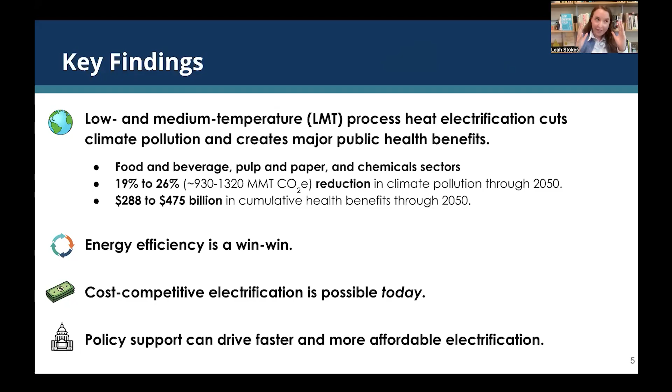It involved a very large team of engineers and policy analysts, and we went piece by piece through the food and beverage, pulp and paper, and chemical sectors, and really built out models of how these industries operate in the real world. And what we show is that low and medium temperature process heat electrification is possible today with the technologies that we have that are off the shelf, and that it can cut both climate pollution and create major public health benefits. So on the climate pollution front, we're talking about a thousand million metric tons, which is a gigaton of CO2 in terms of reduction by 2050. That is a big number for those who aren't in the gigaton trade.

We also find very significant public health benefits. So we're talking about the order of 288 to 475 billion with a B dollars in public health benefits. These are things like fewer asthma attacks, fewer visits to the ER, and longer lives, because we know that pollution in our communities from these factories is affecting people. Throughout this report, we also look at energy efficiency upgrades that we can do to reduce overall primary steam production.

And that's really a win-win because it reduces the costs. And we show that already in many states and some specific subsectors, electrification is cost competitive today. And even in places where it's not,

primary heat is not a big input into manufacturing, meaning that, for example, if you electrified a milk processing plant, a pasteurization plant, and it doubled your energy costs through electrification, that would still only add 1 cent to a gallon of milk. So we can do this. We can make progress today with the technologies we have, even with the cost as it is.

And of course, policy support, whether in a future federal moment or at a state level, can really make this accelerate and drive faster and more affordable electrification.

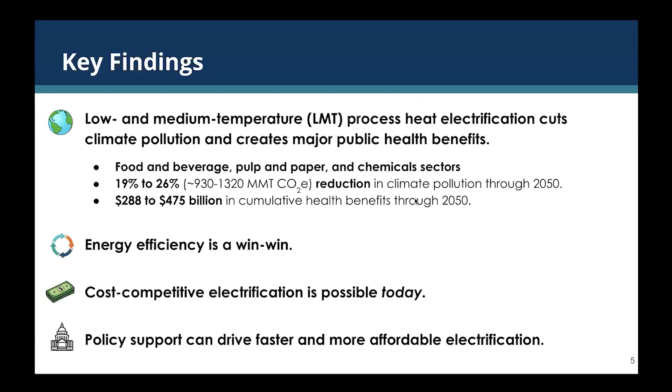Thank you, Leah. It's great to be with you, and thank you for your work on industrial decarbonization, which is a huge part of our climate solution. I'll touch on three things, but I want to open by saying how glad I am to be on this program with Martin Heinrich. Martin and I are the two ranking members, him on energy, me on public works. We're working on permitting reform, which I'll get to later. And he and I have been working on climate issues together as part of a little Senate climate team for quite a while now. And he's quite outstanding, as you'll see in his remarks.

The first of the three things I want to touch on is CBAM, the Carbon Border Adjustment Mechanism in the European Union. If you track the Potsdam Institute's work, they've done a review of like 1,200 different climate scenarios that were generated for the IPCC process over time. And out of those 1,200 different climate scenarios, there are 11 left. 11 out of 1,200 left that get us on a pathway to climate safety.

All the others are exits we drove by a long time ago, and they just aren't available to us any longer. So it is now essential to climate safety that we look at what those 11 different scenarios show, and all of them require a price on carbon. The pollute for free business model of the fossil fuel industry is lethal to our chances at climate safety. In addition to being morally wrong and economically wrong and environmentally wrong, it also is a dead end and a prescription for climate failure. So we really have to focus on trying to support and expand the CBAM.

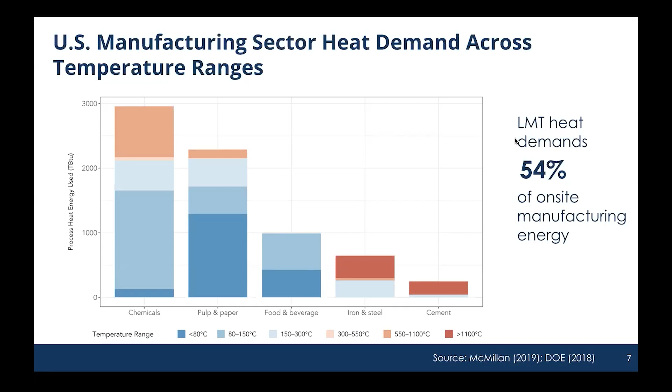Around half of that heat is what we would classify as low to medium temperature process heat, meaning that it falls under around 300 degrees Celsius. Now, that might seem pretty hot by human standards, but by industry standards, it's actually quite low, considering that some industries like cement or iron and steel require process heat in the thousands of degrees in order to perform their operations.

And so, why is this range of temperature important? It's because we have technologies that are available today that can replace fossil fuels for generating that heat with clean electricity. And these are ready today.

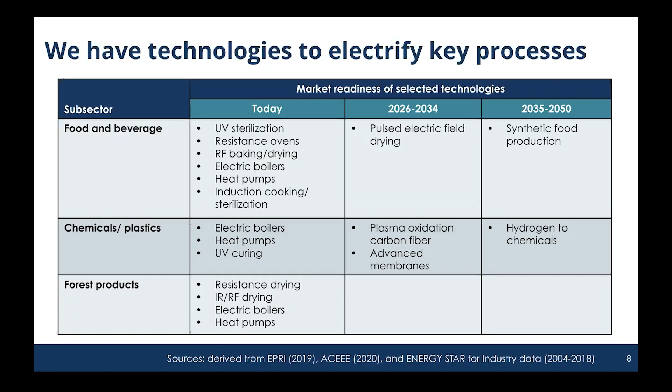And just to give you some context, the results you're going to be seeing are really focused on three primary sectors in the United States. Which are these sectors? These are the chemicals manufacturing sector, the pulp and paper manufacturing sector, and the food and beverage sector. So collectively, these three sectors account for many thousands of products that we purchase in our daily lives that are critical to our economy.

They account for many jobs across many states in the United States, but they also account for the vast majority of that low and medium temperature process heat opportunity that we're going to be exploring today. Overall, all forms of heat in those sectors account for around a third of the emissions from the US manufacturing sector. And the US manufacturing sector is clearly only one of the sectors that we need to decarbonize, but it's an important one.

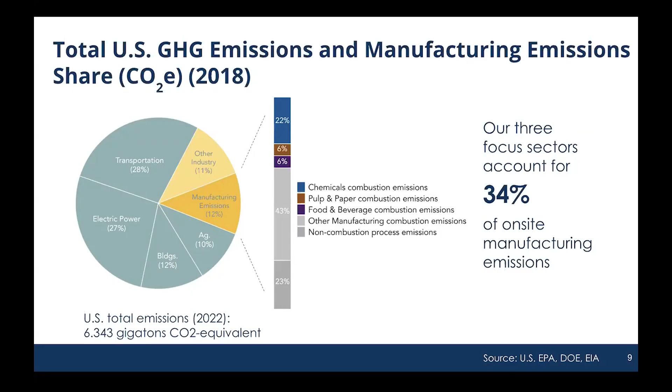But just to put it all into context, if those numbers seem a little small, we need to take a step back and remember that the US is the second largest emitter of greenhouse gas emissions globally, right after China. So this one space, low and medium temperature process heat in these three critical sectors, actually can contribute an outsized share of the global mitigation we need to keep our global temperature rise in check. So they're very important. And with that, I'm going to pass it back over to Leah, who's going to talk a little bit more about our scope.

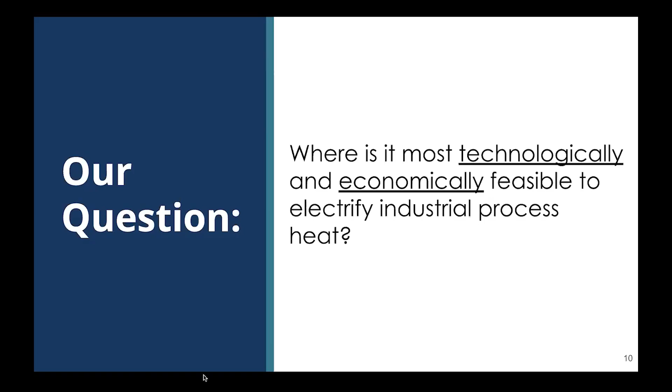So what we do in this report, which, as I mentioned, was quite an undertaking, a very large team of engineers and policy analysts working for really a year and a half. And we wanted to answer this question, which is, where is it most technologically and economically feasible to electrify industrial process heat today? That's the question we want to answer. And what we focused on here is really four main technologies.

So the first is an industrial electrode boiler. This is what we're going to call a sort of drop-in technology, because you could take a natural gas boiler that's already operating at a plant and you could replace it with a fairly similar footprint as well as a fairly similar process.

And you can think of it as equivalent in, for example, the building sector to something like a resistance heating technology. The second big technology, you won't be surprised to hear me say, is a heat pump. It's an air source high temperature heat pump. So these are much bigger than the heat pumps that you might be familiar with in a home context, in a building context, but they have the same sort of principle. And there's been a lot of breakthroughs recently with companies like AtmosZero and Skyven that are able to do higher and higher temperatures at a more economic price.

But I don't want to leave aside other direct combustion that's happening. So right now, for example, if you want to cook something, like you're making cookies, for example, in a facility, or you're drying herbs for tea, dried tea, that is using direct fired gas in a lot of cases. And we can be swapping those out for electric ovens, just like you might have in your own home, an electric oven and an electric dryer, right? Same sort of principle, but on a really big scale.

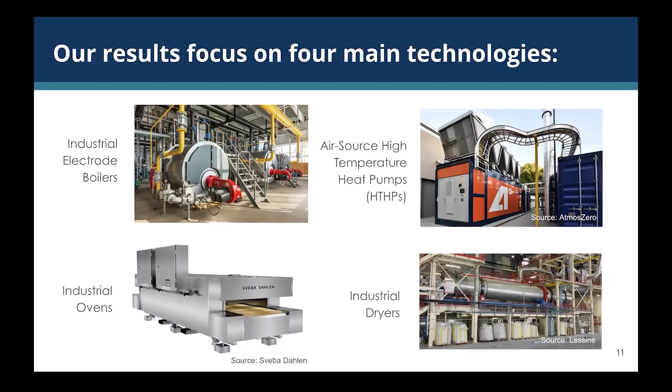And so what we looked at for each sector is we came up with four scenarios that combine all these technologies. So in the baseline scenario, what we did was we first modeled the processes of how we think these plants are operating today across all these different subsectors. And then what we did is we said, well, what if instead of using gas boilers and instead of using gas ovens and dryers, you instead swapped in an electrode boiler? So that scenario is what we're calling drop-in electrification because it doesn't require a lot of systems change and it has a similar footprint in the actual facility.

Now, you can also combine that drop-in electrification with energy efficiency upgrades. This is an old idea that is evergreen, right? Which is the idea that we could be insulating pipes, for example, using waste heat recovery, trying to maximize every little drop of heat throughout the system so that it's not leaking away. And so what we look here is at pretty tried and tested ideas for how we could upgrade the thermal energy efficiency of these plants.

The second major block of scenarios is what we're calling an advanced electrification scenario. This is a scenario where we're swapping in an air source high temperature heat pump, and we're also electrifying those downstream processes where they exist, like those ovens and dryers. And again, we have a scenario where we combine that advanced electrification, putting in that heat pump, which might require some retooling of the plant a little bit or a little bit of different floor space. That's why we're sort of framing it as advanced. And we combine that with energy efficiency too.

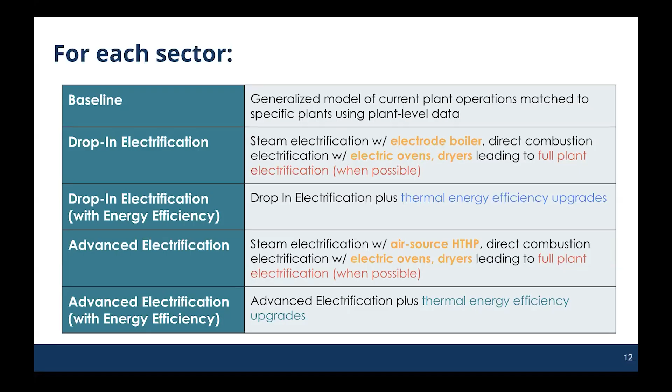And what you see here is combining a really efficient machine, a heat pump, very efficient, right? It has coefficients of performance of like 300%. Combining that with traditional energy efficiency is really where you get a lot of those operating cost savings because it's just such an efficient process. So with that, I'm going to pass it back to Eric to walk you through what this modeling process actually looks like in practice. Thanks, Leah.

And I promise I'll be concise here because what you're seeing is quite complex. And that's because industry can also be very complex. And so the way we designed this project is we didn't want to just make high-level assumptions about what a fluid milk plant could do or what a pulp and paper plant could do. We wanted to base our analysis in a really rigorous understanding of the operations that are occurring in those types of plants. And we did so by developing a series of what we're calling process archetypes.

And the example you see here is for breweries, circling back to the idea of beer, which we'll get to also at the end. And the idea behind these archetypes is that we wanted to acknowledge the complexity of industrial plants, but also cut through that complexity so that we could identify opportunities that were both feasible in a real world context, but also realistic for plants. And so what you're seeing here is kind of a schematic of what an archetype looks like.

So for making beer, there are a number of unit processes that occur in most breweries. These facilities use a lot of steam and hot water that typically comes from a boiler. And we've modeled all of the energy and mass flows that allow a facility like this to take in its inputs and to produce that output, so many liters of beer.

The advantage to this is it makes sure that we get all of the process intricacies correct, right? We don't ignore something that would be potentially a barrier in a real world plant. The archetypes are also open source, meaning that anyone can use the code, look at our assumptions, replicate it, and vet them right down to the specific technology. And here's how we use them.

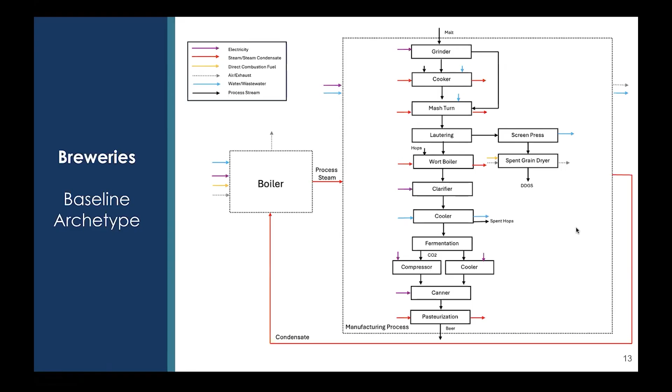So this first baseline archetype, we start with this understanding, and we calibrate these archetypes using reported data for large breweries coming from, for example, the EPA's greenhouse gas registry, other information from the literature to make sure that our baseline understanding of a sector is technically accurate. We then use the archetypes to start deploying technologies. So Leah just described to you our scenarios.

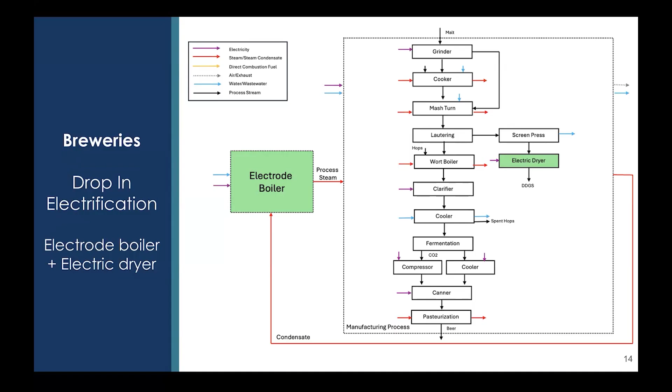So in our first scenario, we're looking at electrifying the boiler, replacing the natural gas boiler in a typical brewery with an electrode boiler. And we're also electrifying the spent grain dryer that was previously running on natural gas. But we're doing so in a way that respects the overall energy and mass flows of the facility. Next slide, please. We can also use the archetypes to look at even more ambitious scenarios.

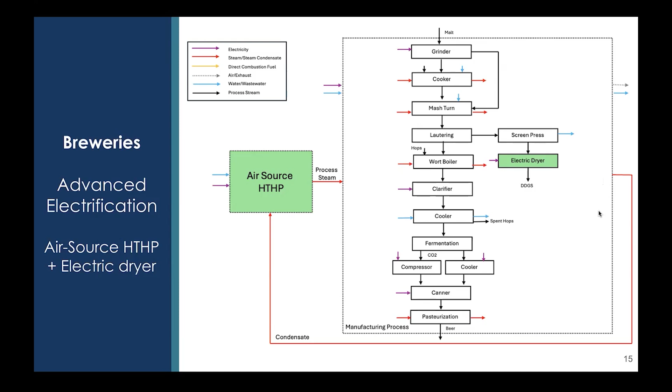Well, what if we didn't just go for electric boilers, but we considered deploying an air source heat pump? The big advantage to heat pumps as opposed to electrode boilers is that they're much more efficient for providing a unit of heat. Why is that? It's because they move heat from one place to another by using electricity rather than creating heat through either combustion or a resistance coil. So you get a big efficiency gain by using air source high temperature heat pumps. So this was another scenario.

And then finally, because we've modeled these plants with such detail, we can also look at the first fuel, which is energy efficiency. It's called the first fuel because often it's very cost effective and it allows you to save energy rather than investing in more energy in the first place. And because of this detail, we can look at a lot of efficiency upgrades at a typical plant, including things like process controls, improving insulation, improving steam traps, a lot of technical details.

But we can also deploy a waste heat recovery heat pump, as you see in this diagram. And for breweries, that could mean taking some of the warm water that comes off the wort cooler and recycling that heat and upgrading it to provide hot air for the spent grain dryer, thereby reducing the need for electricity after we electrify.

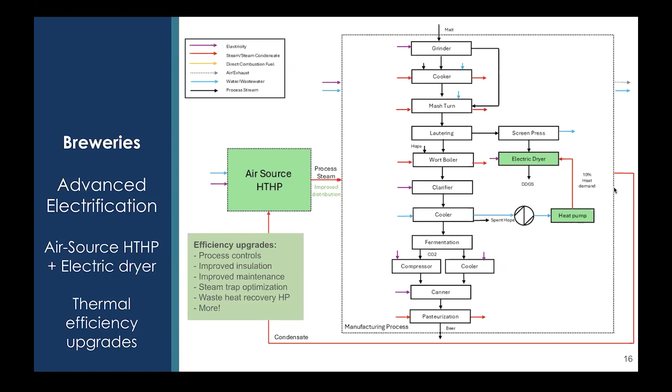So the beauty of efficiency is you get the same product with a lot less energy input, which means the investment that you need to make in a heat pump or an electrode boiler or even a dryer gets more tractable because the capacities go down thanks to plant level efficiency. So our argument is we want to do it all at once. And I'll turn it over to Leah to talk about some of the results from this approach.

With electrode boilers, again, the analogy here, if you're familiar with resistance heating, and for example, the Southeast has a lot of resistance heating in buildings, is they're not as efficient of a process, so they need to use a lot of kilowatt hours to make that heat. And so with the grid as it is today, there would be some short-term emissions increases.

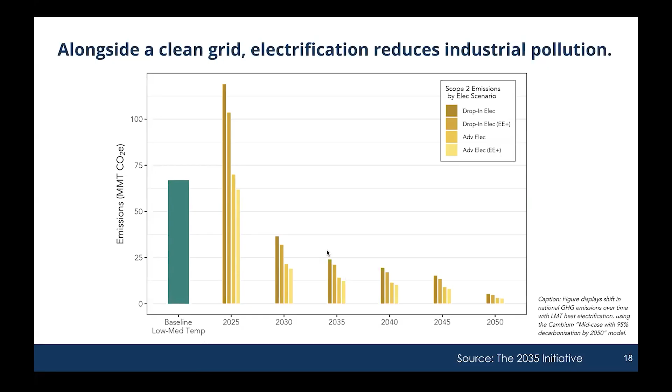And the brilliant thing about electrification, which you might be familiar with if you know about electric vehicles or heat pumps in buildings, is that they kind of get cleaner over time, right? These machines are as clean as the input fuel that you're putting into it, as clean as that kilowatt hour is, as clean as the electricity is. And as we clean up the electricity grid, these technologies essentially get cleaner. And you can see that very clearly here, that out by 2050, we have very, very little emissions coming from these actual technologies because the grid is so clean.

We also just wanted to unpack this for today. Now, this is using 2023 data, so it's already a little bit old, but that's the most recent data that we had available. But you can already see that even 2 years ago, if you put in an air source heat pump on average across the United States, these are these high temperature heat pumps at an industrial facility, on average, you're going to already start saving emissions. That isn't as much the case for an electrode boiler, but it is the case in many states, like in California and Washington and Vermont. And that's because those grids are already clean.

And what will happen is that as the grid gets cleaner over time, all of these technologies will really be cutting pollution very easily. So it's a very similar story to what we know from electric vehicles, right? Sometimes people think, well, if I plug in my electric vehicle, is it actually dirty because the grid is running on coal? These technologies, especially the heat pumps, are so efficient that they don't have to use that many kilowatt hours. So even as the grid is still cleaning up, they're already saving pollution.

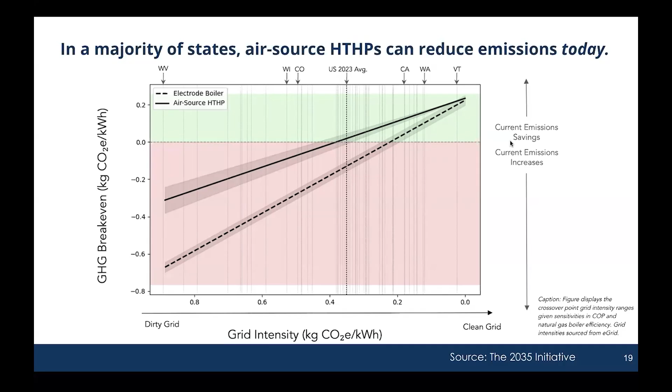The other thing that we wanted to do in this project is really look in detail at what are the different emission sources, what are the different fuel sources from the chemicals, pulp and paper, and food and beverage sectors. And what you can see here is that in the chemical sector, a lot of the fuel is natural gas. Now, we can't electrify all of that very easily because some of it is higher temperatures that we're not looking at in this low and medium temperature process heat.

But you can see here that that really big blue bar at the top under the baseline, what it turns into essentially is that yellow bar, because you're moving the on-site combustion of gas into sort of what you might call scope 2, or I think it's scope 3 emissions, right? It's the off-site purchase of clean electricity. And so you can see here that it really does shrink down if we electrify the parts of the gas that can be electrified easily in low and medium temperature process heat for chemicals.

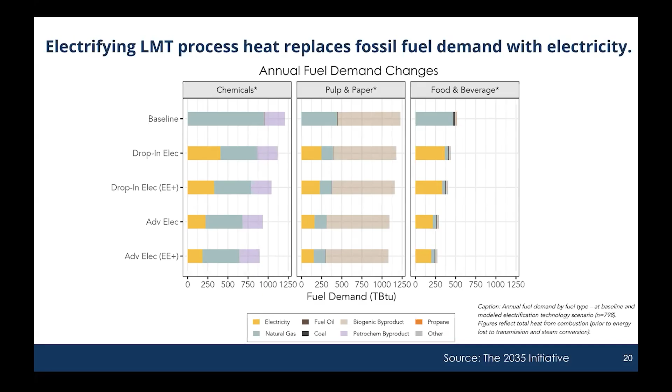And one of the findings from our report is that pulp and paper is a really big sector with a lot of opportunity just with electrifying that boiler, because these are really, really large plants from an emissions perspective, even if we only look at the fossil fuels. Food and beverage, by contrast, is a sector where most of that natural gas can be electrified. You can see that that blue bar shrinks down a lot. And again, the yellow is just the electricity scope 2 emissions. And so as the electricity grid gets cleaner, that will get better too.

Now, of course, you might be wondering, with all this talk about data centers and some of the things that the senator said, that, wow, if we need more electricity for all these large factories, isn't that going to increase electricity demand? Yes, it will. But this is something that can be managed. And my personal view is that this is a really important thing that we have to electrify, right? We want to keep manufacturing in the United States. We want to have these good paying jobs, and we want them to be clean.

And for all the reasons that Senator Whitehouse talked about with the carbon border adjustment mechanism, right? It's going to be a competitiveness issue as well, to make sure that we're not being left behind as Europe continues to invest in these kinds of technologies.

What we did in this scenario is we looked at the bottom quartile, the 25% of the plants that have the best payback period, and we said, what if they all electrify tomorrow? What would that do to the grid? And so some of the best paybacks that we're generally seeing are in the Midwest, and so that's where we see a really big jump. Similarly, in New York, there's a really good payback period because the electricity price compared to the gas price is such that it's actually a very good state to work on electrification.

Now, this isn't how electrification would actually proceed. California, in our model, has such high electricity prices that in this 25% cheapest scenario, nothing gets electrified. Well, we know in practice that California is very committed to electrification. They have the Indigo program, for example, and they want to move factories in this direction.

So in practice, we likely would see a very different pattern, but this just gives you a sense that we are going to have new demand and load on the grid, which is why it's so important that we build clean electricity really fast and we interconnect it into the system quickly, and that we make good decisions when it comes to other large loads like data centers, because the industry does have to be electrified if we want to be keeping good paying and clean manufacturing jobs in the United States. And with that, I'm going to pass it back to Eric to talk through the economics of electrification.

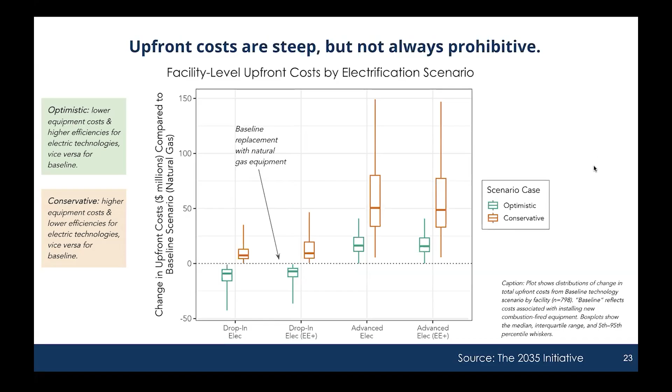But by doing it this way, we could go into the investment analysis with both eyes open and be very transparent about where opportunities are ready to be seized today and where some of the more challenging opportunities may exist across our sectors of focus. In all cases, though, the energy efficiency had a demonstrable effect on our overall emission savings.

We also considered net present value, which is a metric that's used by many companies when evaluating a project investment. And ideally, the greatest net present value, or a net present value that's the least negative, represents the most beneficial investment. So in this graph, what you're seeing is an NPV analysis. Now, a key caveat is that we didn't consider the return on the investment, which would be all the stuff that you're producing, which you make money for in a plant.

Rather, what we considered were the upfront CapEx costs associated with the investment, the installation costs, the maintenance costs over the lifespan of the technology, and then, of course, the fuel or electricity you need to run that equipment over its investment period.

And what we can see here is that in both the conservative and optimistic cases, there are more investments required to seize electrification opportunities from an NPV perspective, but the proposition gets more and more attractive as the level of ambition rises, going from a simple drop-in solution to one that's very ambitious with energy efficiency. And in the optimistic case, the gap between the status quo and these investments starts to shrink.

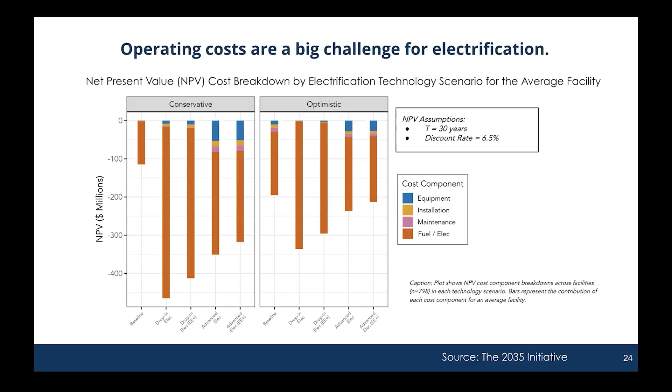And where investments are most attractive really hinges on two key factors. The first is the so-called spark gap. That is the ratio of the price of electricity in a state to the price of natural gas for the same amount of delivered energy. So if we have, for example, a spark gap of 2, that means electricity is twice as expensive as natural gas in that location for the same amount of energy to run your processes. So the most attractive investments are currently, we found, in states where that spark gap is the lowest.

The other factor is the operating temperature, right? It takes more energy to reach higher temperatures. So industries that have a larger share of their energy use in the lower end of the spectrum for low and medium temperature process heat, think basic steam or hot water. For those sorts of factories and those sorts of industries, the investments are also attractive.

And on the next slide, if you read the report, you'll find our summary of payback period. So a payback period is essentially a simple metric that tells one, if I make an investment, how long before the savings from that investment will pay off that initial investment. And if you don't save more costs than the initial investment, you have no payback.

But we found that there are many locations around the US where facilities we think can achieve payback periods today that are fairly low. Here you see in the graph, we considered 3 ranges of payback. Under 5 years, these are sort of the slam dunk investments, between 5 and 15, and greater than 15 years. And as we move up in the ambition levels across our scenarios, we're adding more and more facilities that have reasonable payback periods today.

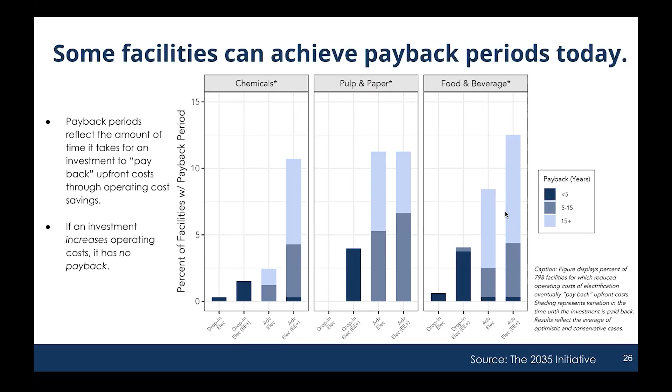The distribution of these payback periods, as I mentioned, really relies on a couple of factors. Where the more attractive end of the distribution may be is a function of the spark gap, and then also the type of industry. So in our report, we've identified what we're calling hotspots. These are opportunities that we think are attractive today, depending on their location. So you'll see states like Delaware and New York and Pennsylvania that have reasonably low spark gaps today.

And types of industries, poultry, pulp and paper, dairy manufacturing, and so forth, which may have a good portion of their energy use that is related to the lower end of the temperature spectrum, meaning we can seize that opportunity through electrified technologies today and for substantial savings.

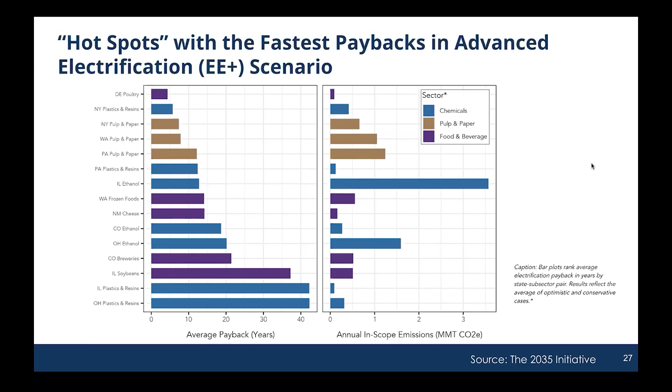And we also considered, beyond just greenhouse gas emission savings and the investment costs required to seize those savings, we wanted to shine a really strong light on the co-benefits of moving to electrification. So in addition to looking at greenhouse gases, we also considered local air pollutants, including NOx and SOx and particulate matter, using models of local air pollutant distribution and affected communities, and found that in addition to reducing greenhouse gas

emissions, between now and 2050, if we were to seize the electrification opportunity space, we would seize hundreds of billions of dollars in cumulative health benefits. We would avoid 1.1 million lost workdays due to respiratory illness. We would hopefully prevent 9 million asthma attacks and prevent nearly 3 million lost school days due to poor air quality if we can electrify the heat that we've identified. We'll also address the pollutants that lead to these adverse outcomes. Avoiding these is another big reason for pursuing the electrification opportunities in our report.

Back to you, Leah. Yeah, so one of the things you might think looking at some of these cost findings is, wow, this is expensive. But that's actually not really true. So heat as an input to manufacturing processes is actually not a really big proportion of total costs. Let's take, for example, that gallon of milk that I mentioned earlier. If we were to double the cost of energy through electrification, which is a reasonable guesstimate given what we are looking at in our report, that would raise the cost of a gallon of milk by just 1 cent.

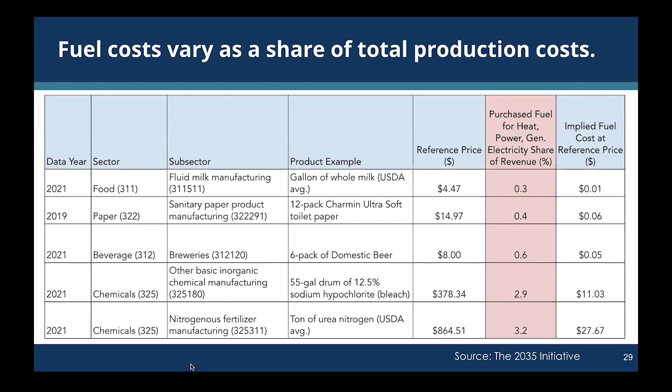Now, I want to make sure we leave time for questions here, but in the report, we looked at a bunch of different policy scenarios for how we could begin to make more progress. Of course, companies can just take action today, and it's wonderful to see some examples of that. But we could also see government support at the state or federal level. We look at a baseline scenario of no support, and then we look at CapEx investment policies, which are things like a 30% federal investment tax credit, or something like 100% of a grant that you might see at the state level. And then we looked at production support policies.

This could be things like reducing the industrial electricity price by about 25% or reducing it by about half. And we also looked at policies like those that Senator Heinrich has championed around creating a clean heat production tax credit. And we looked at a scenario for $5 per MMBTU and a higher scenario of $10 per MMBTU. And then we also looked at a combined one where we take a CapEx ITC of 30% and we combine it with a reduced electricity price of 25%.

So what does this look like? Well, as Eric already walked you through, under this no policy scenario, we're looking at projects being in the money in something like 15% of cases across these different sectors. And they have relatively longer paybacks, even if they're in the money, of 15 plus years. But when we start to see policy, things like reducing the electricity price by 25% through a beneficial electrification rate. Many utilities offer rates for charging an EV that is a lower rate. We could also be doing that for clean factories that are using, for example, heat pumps.

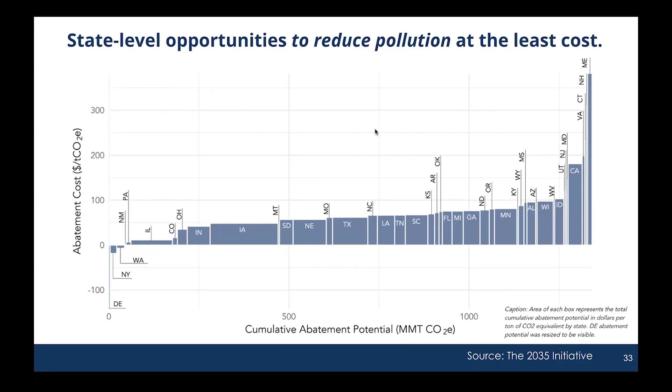Across the states, there's different spark gaps and different processes. And so we model the sort of abatement curve. You probably are familiar with marginal abatement curves, and you can look at that if you're interested. There's some states like New York that really stand out in terms of making good progress.

And we just also wanted to highlight that these are things that are already happening in the world. It's not just our report with theoretical ideas. There are real factories in the United States and also in other places like Europe that are doing this. So in the pulp and paper sector, we have examples of lumber drying in many states across the country.

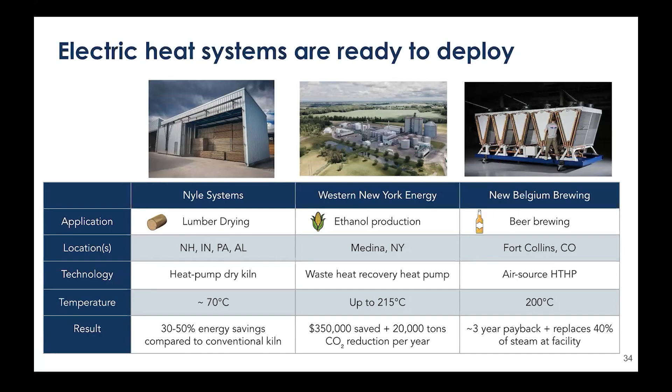In upstate New York, we have an example of an ethanol production facility that's using a waste heat recovery heat pump. And the classic example in Colorado of New Belgium Brewing, all the climate people should buy their beer, I suppose. They are an example of using an air source high temperature heat pump.

I just also want to mention that another way to deal with some of the higher operating costs is to think about other technologies that directly use heat rather than using electricity to make heat. So that is, for example, geothermal, and we've already published a report about how next generation geothermal can be used in the industrial sector. We're very excited about this work and think there's a lot of opportunity.

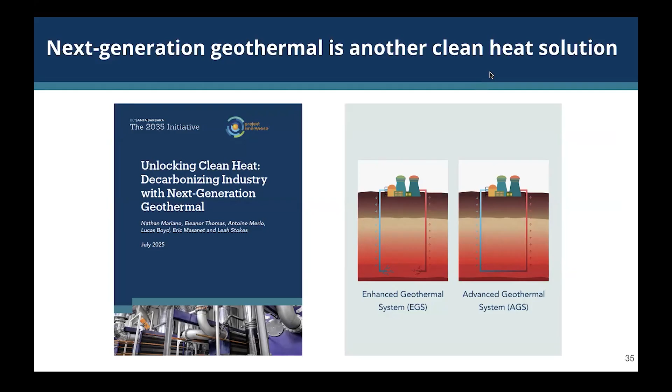And we also talk briefly about solar thermal as another example, and it is being used, for example, in milk processing plants already in California.

So some of the policy recommendations that we talk through in the report are reducing risk and capital expenses by some of these upfront CapEx support policies, reducing operating costs overall, using things like efficiency and pollution standards as is being used in some air quality management districts in California.

The example under the Biden administration of having buy clean programs from the federal government is something that states can do and that we should see again from the federal government in the future. Reducing and eliminating fossil fuel subsidies is very important, and creating technical assistance programs so that factories can learn from others that are already doing this and share best practices.

Before I turn it over to questions from folks for the last 8 minutes or so, I just want to point out that one of the things we did is create a very dynamic web tool where all this data is live. And so if you want to know where are these factories in my community, or you're a campaigner working in a specific state, you can go and look up this data.

So with that, I'm going to stop sharing my screen. And I see that we have a couple questions here. Ron Steenblik asked a question about plastics and, I'm going to just summarize it, do we want to continue to electrify plastics necessarily when they have all these other negative impacts for society? I just skimmed that question, so I hope I approximately hit the nail on the head. But Eric, do you want to try to take that one?